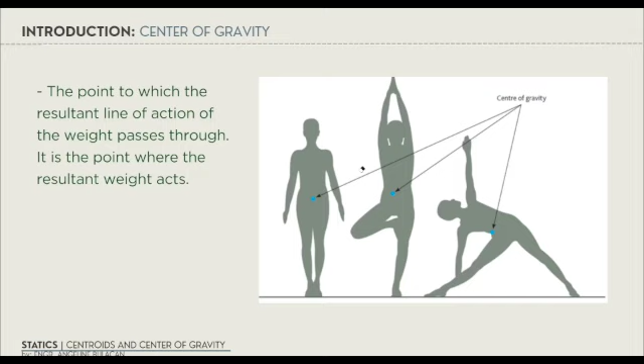So hindi naman natin sinasabing yung weight is only at a single point. We are just simplifying for easier analysis. So again, the center of gravity is the point where the total load acts. Next.

So next we have the centroid. The centroid is the geometric center of a body. This means it depends only on the shape of the object, not on its weight. When we say neglecting its weight, it means we're only looking at the form of the object, not the mass or the gravity. So in simpler terms, yung centroid natin is yung center ng shape. Compared to the center of gravity, where we consider the weight of the object, for the centroid we consider only the shape. The key difference: for the centroid, we ignore the weight of the object.

So for example, if you have a rectangle, the centroid of a rectangle is where the diagonal lines intersect. If you draw diagonal lines across the rectangle, nandun po yung centroid. Or in this image, if you have a triangle and you place a line from the center of each side up to the opposite corners, the point of intersection is where the centroid lies. So even if the object has no weight, we can still find its centroid depending on the shape. Key emphasis: centroid is geometry only, the weight is not included.

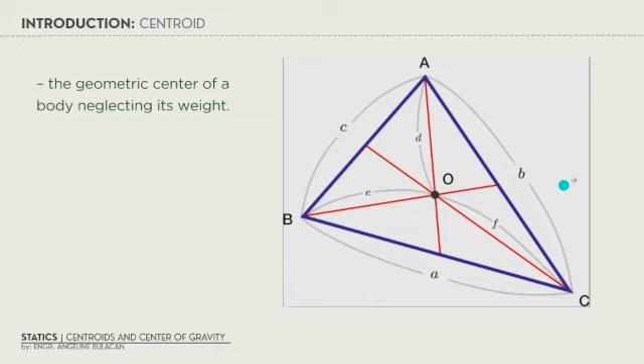So now naman, let's find the center of gravity of a flat plate. So to do this, we use the principle of moments, as you already know. But instead of thinking of the whole plate at once, we break it into small parts. So each small part has its own weight. For example, yung part na to, it has weight 1, the other part may weight 2, weight 3, etc.

So what we do is, in each of these small weights, may kanya-kanya silang centroid. For example, yung weight 1, nandito yung centroid, weight 2, nandito yung centroid. So, instead of one object, we have many small forces acting downward. Ano po? In this example, meron tayong dalawa. So, yung forces na to is what we call, again, the parallel force system. Because all of them are acting down in the same direction, parallel force system sila.

So what we do is, we combine all these small forces into a single force, in this sense, the resultant weight, your W. And then the location of this total weight acts at the center of gravity of the entire plate. So in a sense, when we want to get the resultant weight and its location, we usually refer to the smaller forces present, and then we combine them.

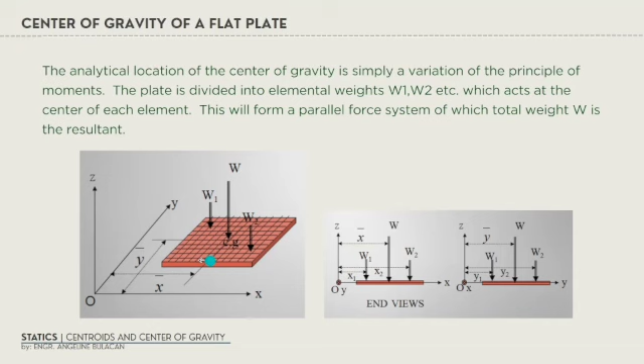Okay, so now let's simplify the computation even more. So, if yung plate natin is homogeneous, ibig sabihin nun, yung material is pare-parehas. Kunyari, kung concrete siya, concrete lang. Kung steel, steel lang. Yung density niya, or itong rho, is constant. And yung thickness is also uniform, or yung T. So, kung constant po yung rho and yung T,

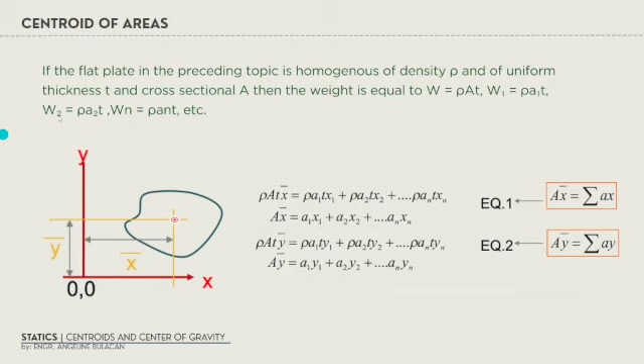ang matitira pong equation dyan is W is equal to A. So, because of this expression, yung magiging weight natin, directly dependent siya on the area. Ano po? So, di ba, if constant ito po, tapos constant yung thickness, pag i-equate mo po yan, makakancel yung density tsaka thickness. Since constant naman sila, it doesn't really have an effect on the equation.

So what will happen is, as you can see here in the equation, the weight of the object is dependent on the area, yung letter A. So the key idea here is, since the rho or the density and the thickness are constant, the only thing changing is the area. So instead of thinking about the weight, we can just think about the area of the object.

So to break it down simply, yung weight 1 is equal to density times area 1. And then weight 2 is equal to density times area 2, and so on. So, yung each weight natin is just based on its smaller area. So, again, for simplification, if the material is uniform, the weight is proportional to its area. So, that means we can replace the weight with area. Ano po?

So, that's why also, as you can see here in the figure sa presentation, instead of W, we are using area. So, this represents the resultant, and these are the smaller areas of the object. So, sinisimplify natin yung ating computation.

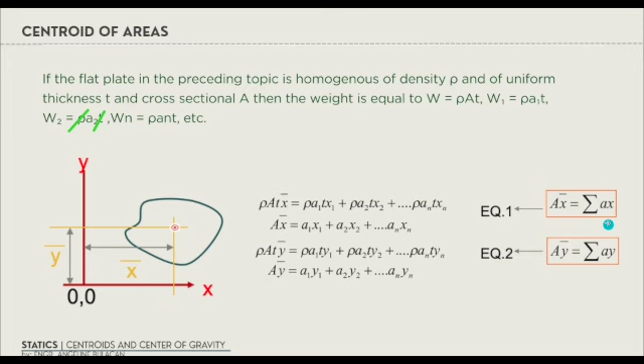So, instead of weight, what we will be left with is area times the bar x. Bar x represents the location of the centroid of the resultant, which is equal to the summation of the smaller areas and their respective distances to the centroid. Ano po? So, we also have a centroid of lines.

So, ang line naman po, imagine naman na instead of a plate, imagine a thin wire. So, i-assume din natin na yung wire na yon is homogeneous or same material, very thin. So, we treat it as a line. So, the weight of the wire will be given by W is equal to density times area times length, where rho is your density, A is the area, L is the length.

So, since this is again uniform, ibig sabihin, constant yung rho or yung density since homogeneous siya, constant din yung area. So, pag constant yun, the only thing that will change is your L or the length of the wire. So, in here, pwede din nating ma-assume na yung W mo is equivalent to your length.

So, going back now to this equation, mapapansin nyo, again, rho and A are constant. So, matatanggal ulit natin yung mga to. So, kung mapapansin nyo, matitira ulit yung LX, or yung total length and the location of the centroid.

And next naman, we have, wait, let me just, okay.

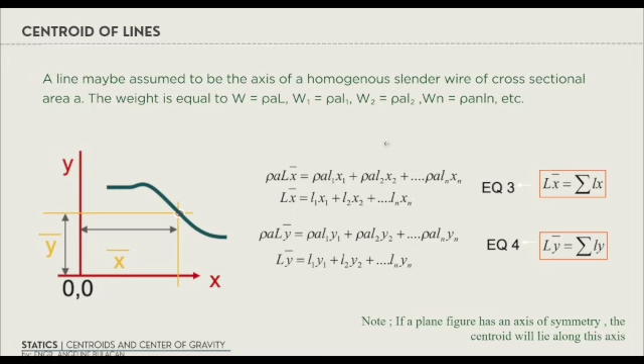Next, we have a centroid of composite figure. So, discuss naman natin siya. A composite figure is a shape made by combining simple shapes. So, for example, a composite body may consist of mayroon siyang rectangle, triangle, circle, or semicircle. So, the idea is instead of solving the centroid using difficult integration, we can divide the figure into these simple parts.

So, think of it like breaking a big problem into smaller problems. Parang ganun lang. So, if alam natin yung centroid nung mas maliliit na shape, we can combine them to find the centroid of the whole figure. So, for composite figure, we will follow the process. First, divide the figure into simple shapes. Next, find the area of each shape. Next, locate the centroid of each shape. Tapos, use the centroid formula to find the centroid of the figure.

So, ano yung centroid formula? Babalikan natin yung kanina, yung total area times x-bar is equal to summation of individual area times individual centroid with respect to x. Likewise, meron naman tayong with respect to y. So, the centroid of the whole figure is not always at the visual center, especially if it is a combination of different shapes. It will depend on how the areas are distributed. So, very important reminder also.

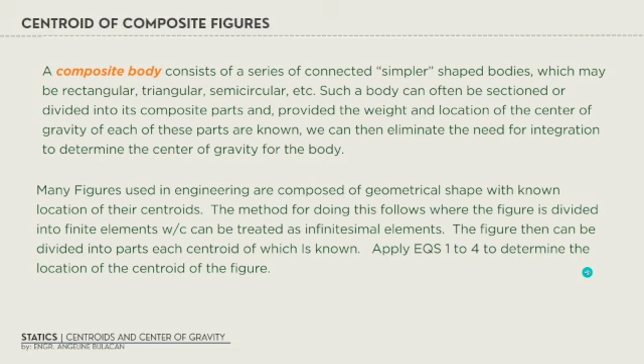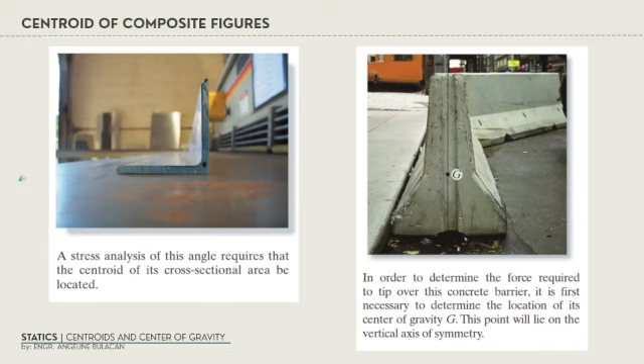Next, we just have here an example. So here we have an angle bar. An angle bar is an example where we cannot locate the centroid just by inspection. So dito, a stress analysis of this angle requires that the centroid of its cross-sectional area be located. So, ang centroid niyan is somewhere dito. The location of the centroid of steel shapes are provided naman. So, if may problem, pinaprovide naman siya kung saan nakalocate yung centroid ng ating angles or steel sections.

So, here is another figure. Etong G, nandyan naman yung kanyang center of gravity or centroid. In order to determine the force required to tip over this concrete barrier, it is first necessary to determine the location of its center of gravity, G. This point will lie on the vertical axis of symmetry. Kapag symmetrical siya, symmetrical means if you cut it in half, the left side and right side of the object are mirrored. Ibig sabihin nito, ang location ng y-axis, alam natin agad, nandito siya sa gitna.

So, the only thing that we need to locate is the location along the y-axis, or yung y-bar niya. This is something that we need to locate for us to be able to know kung saan ba ako mag-a-apply ng force and what force should I apply for this barrier to tip over. Kaya very important na nilolocate natin yung centroid because it relates to the stability of an object.

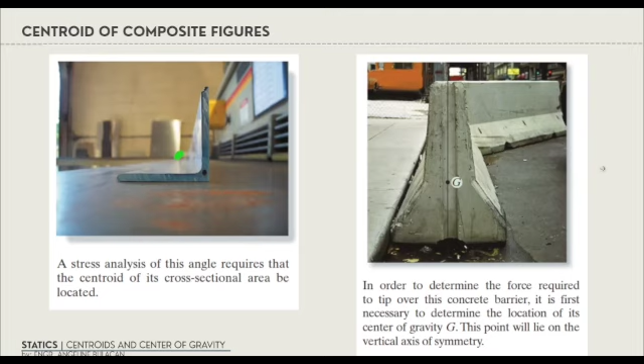So, bakit importante? Kasi once you go on and design, you need to be able to locate where the centroid is, because kung nasaan ang centroid, doon dapat subjected yung weight na kinikerry niya para stable yung ating structure.

So, we have here centroid of common shapes. This table shows the centroid locations of the shapes we usually use in engineering such as rectangle, triangle, semicircle, quarter circle. Hopefully you already know how to compute your area, di ba? Rectangle, base times height. Triangle, 1/2 base times height. For the semicircle and the quarter circle, instead of memorizing this, ang i-memorize nyo na lang is area ng circle, di ba?

Pi r squared or pi d squared over 4. Kung semicircle siya, i-divide mo lang ng 2 kasi kalahati ng isang buong circle. Kung quarter circle naman, i-divide mo lang ng 4. So, isang formula na lang ang i-memorize nyo, yung area ng circle. One thing that you need to be familiar with is this. So, explain natin.

So, ano ba yung x-bar, saka ano ba yung y-bar? Each shape natin, meron siyang area. Kunyari, ito, area is base times height. Tapos, location ng centroid, x-bar and then y-bar.

Ang centroid location niya, usually, it is the distance from a reference edge or from the axis itself. So, hindi po ito constant. This will actually depend on where you will reference the axis. So, example, in this figure, ang ginawang reference line is ito. Nakita nyo may arrow and then this one here at the bottom. So, these two are the reference line.

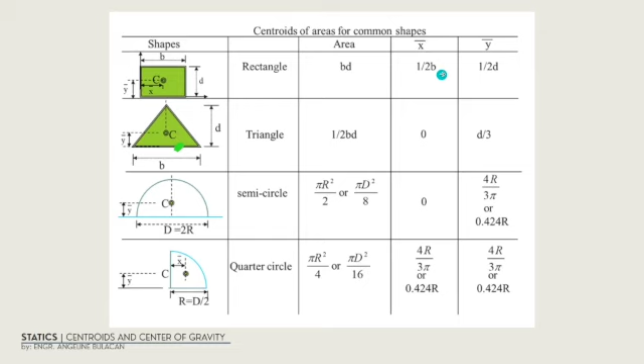So, kung kukunin ko daw yung centroid, this dot here, ang location or ang x-bar niya is kalahati ng B. Kaya ang x-bar ko is B over 2 because that is the distance from this point to this point. Palitan natin ng color. That is the distance from this point, di ba? Ang reference line natin is this one here. So, the distance from this point to the centroid, that is your B over 2. Kaya yan yung inyong x-bar.

As for the y-bar, again, ang reference point nyo is itong arrow na to. So, from that point papunta sa centroid, ang distance na naman is kalahati ulit ng D.

So explain naman natin. Dito naman tayo sa triangle. So as you can see, ang reference po natin is itong dash line. So siguro I'll color the reference as yellow. So ito yung reference line natin ha. Tapos, ang centroid natin is ito, 'di ba? Itong letter C. Ito yung centroid. So, ang area ng triangle is 1/2 base times height.

So, dito, as you can see, yung x-bar ko is 0. Ang x-bar ko is 0 kasi po, yung centroid ko is nandun na siya sa reference line. Hindi siya nag-move. Kumbaga, direct nasa y-axis na agad yung ating centroid, kaya siya 0. Pero, sorry, ito pala ang reference line ng y-bar, andito sa ilalim.

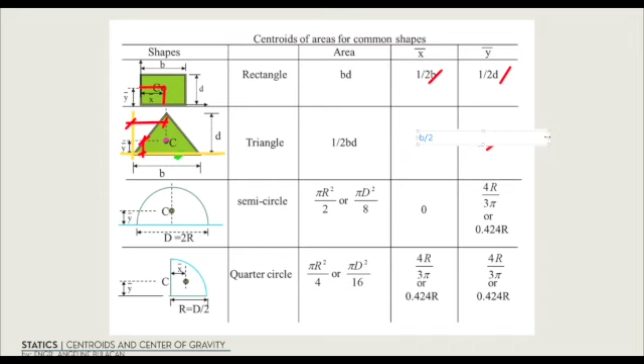So for example, alisin ko to. Kunyari, ang ginawa kong reference line is wala dyan sa gitna, lilipat ko siya dito sa dulo, for example lang. Kung dito yung ginawa kong reference line, instead of 0, yung centroid ko po, meron na siyang distance dun sa reference. And ang distance na to is kalahati ng b or b over 2. So instead of 0, magiging b over 2 kapag ang reference line ko is nandito sa edge.

So this is something that most of the students get confused with. So don't memorize these values. What is important is you understand really how you locate the centroid. Kasi ang main idea is you need a reference line and then what is the distance of the centroid dun sa reference line natin. So yun yung magiging x-bar and then y-bar.

So ito, something that you need to memorize or be familiar with. Pag may triangle po kayo, ang hati ng triangle is 1/3 and then 2/3 palagi. Yung malapit dun sa dulo or dito sa portion na to, sila yung 2/3. Yung malapit dito sa portion na to, yan naman yung 1/3.

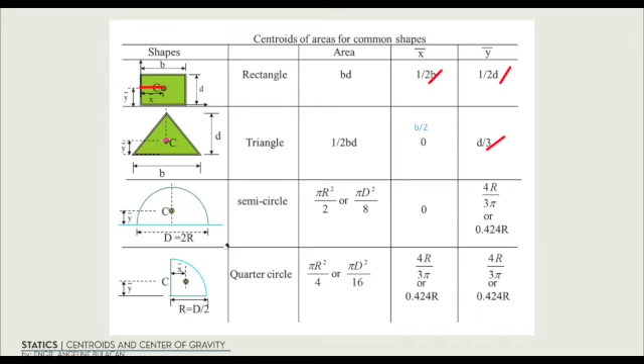Pag semicircle naman, kasi kung may circle ka, madali lang ang centroid. Pag may semicircle ka, this distance is your 4r over 3 pi. So this is something that you need to be familiar with. Same with the quarter circle, 4r over 3 pi din po yan. So again, I have already given you a copy of this presentation, so meron na po kayo nitong tables. So again, to better understand, we will have an example, which I will be solving manually.

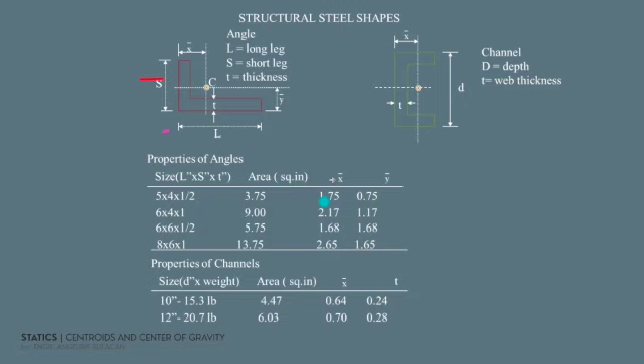Sorry, this one pala po. This is a structural steel shape. So ito yung sinasabi ko earlier na kapag nagbigay po ng sizing, ibibigay din po yung centroid. So let's have an example.